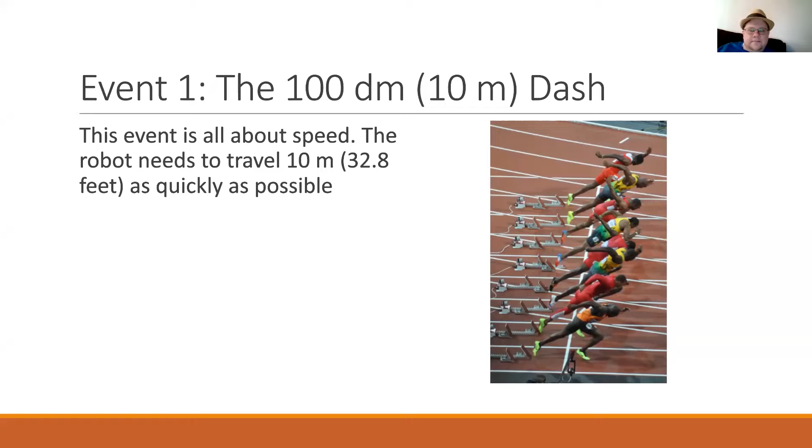So do you folks have any questions about the first event? Okay, pretty straightforward. Event 2, we're calling this the hurdles. Although this is more of an obstacle course, but I couldn't think of an Olympic event that went along with this, so we just settled on hurdles here.

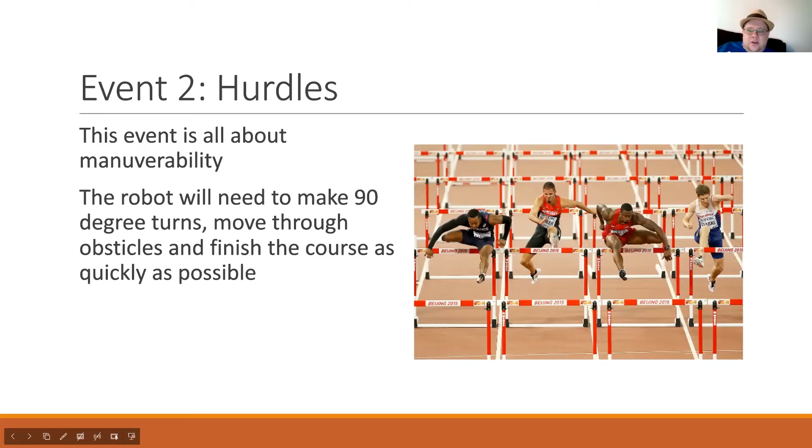This event is all about maneuverability. Your robot is going to need to make very tight 90-degree turns, move through obstacles, and finish essentially an obstacle course as quickly as possible. So while speed is a factor, because you do want to finish as quickly as possible, maneuverability is a big deal with this.

Okay, I got a Discord ping. We got to make sure. Okay, one of my other teammates is taking care of it. Thank you Vikram, just wanted to make sure that's okay. So sorry about that.

Okay, but yeah, it's essentially maneuverability. We will be giving more details about the course and what kind of things your robot is going to need to do in the 4th workshop, the last workshop that we're going to be doing. That's where we're going to be focusing on the event and helping you folks get ready for it. Do you folks have any questions about event 2?

Event 3 is a robot climb. In this event, robots will need to climb increasingly steep ramps without grabbing onto anything. Grabbing onto the ramp and pulling yourself up is prohibited. This is all about climbing up with just the torque in your wheels.

We're going to go as steep as teams want to take it, starting at about a 20-degree angle and moving up to as intense as people want. The idea is you'll climb up the ramp without tipping over. The robot that can climb the steepest ramp will win, with time being used as a tiebreaker if necessary.

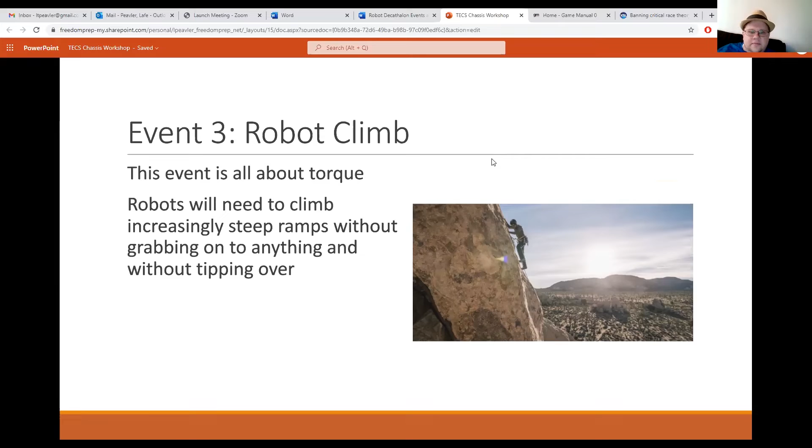A lot of the resources I'm about to present to you today came from both my experience. I have been a coach for FTC for 3 years, and I've used a lot of the systems we're going to be talking about today. I'm also inviting a lot of you to share your experiences with these different systems. I don't want this to be necessarily just me talking, but a lot of the information from this presentation can be found in a resource called Game Manual 0.

I'm actually going to type this in the chat so you can refer to it later: gm0.org. If you do not know about this resource already, this is an excellent resource for you to use. That link is also on the Discord in two places, actually, both in the resources channel as well as the RC resources.

So if you're confused about where to get started, or what a gear ratio is, or what motors you should use, Game Manual 0 is an excellent place. This was written by people that have done FTC, and not just done FTC, but done FTC at the highest levels.

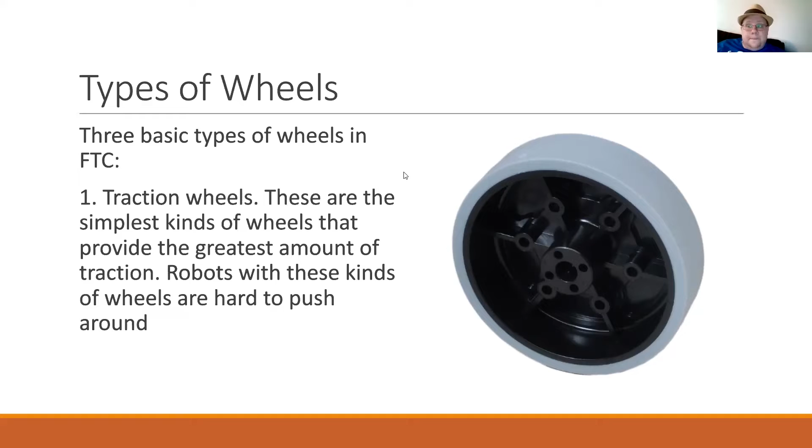The second type of wheel you need to be aware of in FTC are the Omni wheels. These wheels have rollers in them that sacrifice some traction, so they're definitely not going to get the same kind of traction as our traction wheels, but they can kind of slide side to side like these guys do without having to fully turn. So Omni wheels are great if you want your robot to be able to turn more easily. The traction wheels don't turn very easily, particularly if you have a tank drive.

And depending on how you configure your chassis, they can lead to some very maneuverable types of setups here.

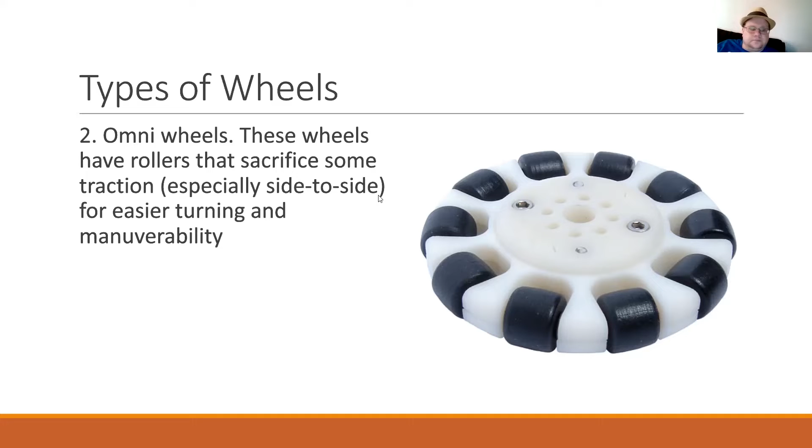And then finally, the third specialty type of wheel that we have are the Mecanum wheels. The ones shown here are the goBILDA V1s, which have been discontinued. A lot of teams still have the V1s. My teams have the V1s. goBILDA has released a thinner version, the V3s, or V4s, I can't remember.

But regardless, the distinguishing factor of these wheels is the fact that they have these 45-degree rollers. And these allow the robot to move and strafe in 8 directions without having to turn. So they are excellent at maneuvering around the field, but that comes at a cost. Mecanum wheels lose a lot of traction because of this. So a robot with Mecanum wheels is much easier to get pushed than one with, say, traction wheels.

They also tend to slip. Now, if any of you have done any autonomous programming with Mecanum wheels, you know that you can't fully count on your encoder counts when you use Mecanum because they can slip and it can throw everything off.

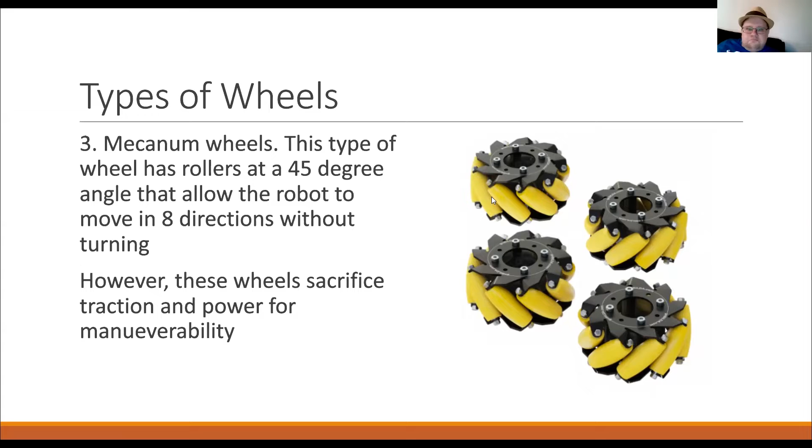Vikram says we've used Mecanum wheels this year. But would personally like to learn more about a traction wheel setup. Cool. The Black Ops also use Mecanum wheels. We've tried the omnidirectionals, but last year we used the Mecanum. Awesome.

Cadets have Mecanum. Okay.

I would like to learn more about how the size of wheel affects the challenges. Yes, that's important when we get to using the right gear ratio on those wheels. The size of the wheel does matter, not to mention getting over obstacles and things like that. So we will talk about that today. That's a great thing.

Thomas says we used Mecanum wheels this year and last year. Yep. Masters use Mecanum wheels too.

Cool, and we had the latest goBILDA one, and they were fantastic. They do not slip as much as the old ones we had before. The V4s you're talking about? Yes, I don't know what version they are, like the latest one they're selling right now.

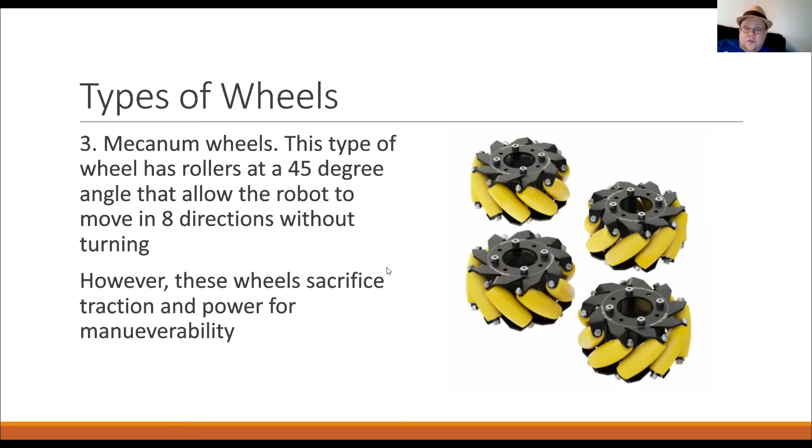Okay, alright, I think we'll move on from wheels. Now let's get to the different configurations. One of the big reasons we're doing this is to introduce you folks to different ways you can set up a chassis depending upon what the game is that year. Now some teams just use the same chassis year in, year out, and there's nothing wrong with that per se.

But there are some configurations that may be better at certain games than others. So as we go along, if you've used a chassis configuration before in competition, any of the ones we've talked about, please say so in chat or speak up on the microphone. So here we go.

So 3 questions I think every team should consider when choosing what chassis to use that year. Question 1: what is the right amount of speed, torque - which we'll talk about more later, torque is force in a circle - and it has a lot to do with how powerful your robot's going to be, how quickly it's going to accelerate, and if you need to push things, how much it's going to be able to push, or resist being pushed.

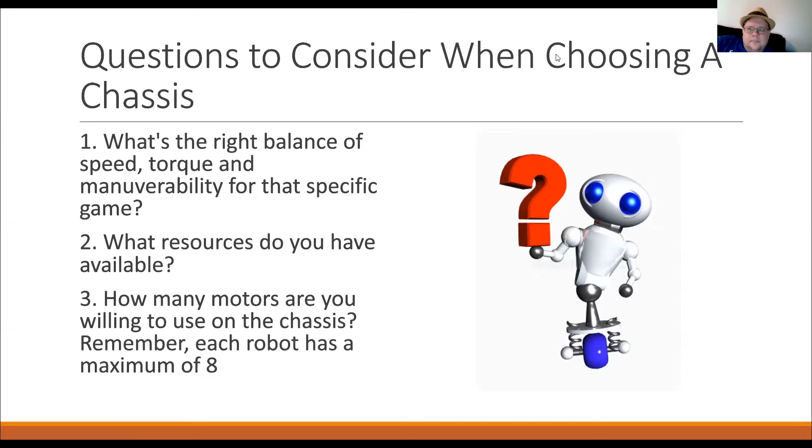It says speed. Speed would be big in Skystone, wouldn't it? Vikram, as the bot needed to be fast and didn't need to be as maneuverable, a fast robot was preferred. Great point, Vikram.

Okay, so now last year's game, Ultimate Goal, how would that be different? How would you approach, if you were to do Ultimate Goal again, what kind of thing do you think would be different in how you would design your chassis? I think everybody here knows Ultimate Goal. I don't think we have any rookie teams here with us today, although we would have loved to have had some.

What kind of things do you think would have been different? Maneuverability was more important. Being able to chase down those rings, and along with lining up the shot, to hit either high goal or power shots or all those kind of things. Any other thoughts?

The point of this is when you're designing your chassis, you need to make sure that your chassis fits what you're doing.

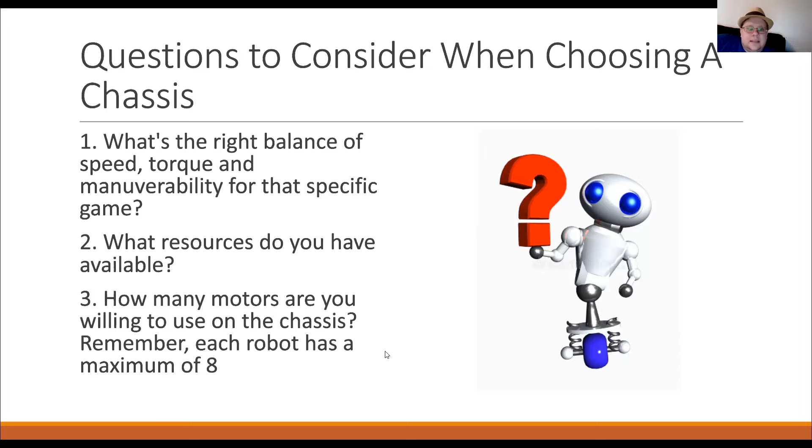Multiple types of chassis configurations can be effective depending on what's your overall strategy, what do you want to accomplish, and making sure that your chassis fits your particular strategy. Not all teams need the same setup, and the thing is, I kind of get this feeling with Utah and with a lot of other places in FTC, is a lot of people have gotten mecanum wheels because they feel like they have to have it, because everybody else, all the top teams, have it. We feel like everybody needs to have it in order to keep up.

Well, Perspective, one of the Park City teams, did you notice that they didn't use mecanum this year? Because they didn't. So don't think that you have to lock yourself into one type of chassis just because everybody else does it. That's one thing I want to emphasize today.

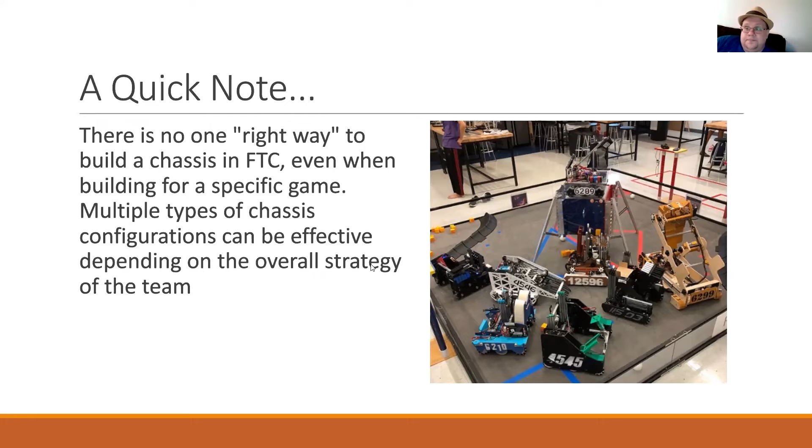Okay, so let's start with the basics. The very most basic type of chassis you can get in FTC is a two-wheel tank drive.

If you were to put 4 traction wheels on this thing, it would have a devil of a time getting turned. The only nice thing about this design is it's simple, easy to build, easy to program. This is a great beginner bot, and that's about it.

Because it only has 2 wheels, it doesn't excel in speed, torque, or maneuverability. This bot can be easily pushed around by other bots. This is a good way to learn the basics, but other than that, you really should move past this as quickly as possible, because a 2-wheel tank drive is not very likely to be very competitive in FTC.

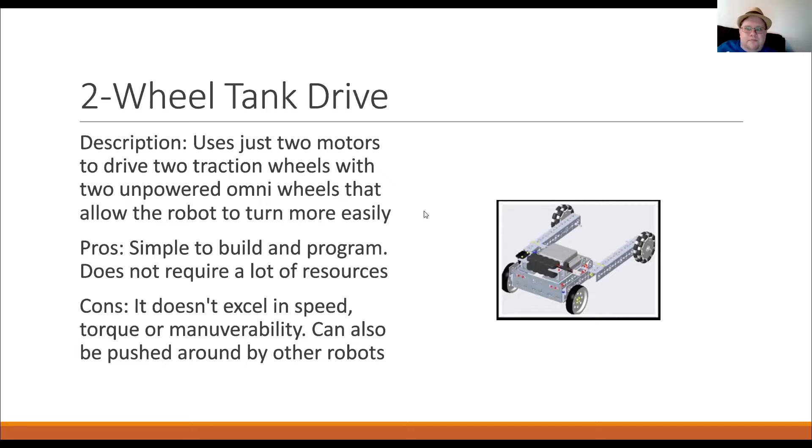So of all the configurations we're going over today, this is one that I would say steer clear of. There are much better ways to build a bot for your buck.

So this is essentially the big difference between the 2-wheel and the 4-wheel: you're powering all 4 wheels. Some teams will do it halfway, using only 2 motors and chaining the 2 wheels together, which you can do if you want. Or what I'd recommend, 2 motors is not enough for a chassis. It's better to use 4 in almost every circumstance, for that extra power, extra speed, all those kinds of things.

So it uses a motor on each corner. This is more maneuverable and often more powerful than the 2-wheel drive.

If you want something that can drive over obstacles, let's say you were doing Rover Ruckus, which had that giant crater thing. Most teams decided not to deal with that and just reached over it instead. But if you wanted to drive over the crater and pick up minerals that way, one possible solution would be to just use larger diameter wheels and be able to drive over it. I think the meta went with reaching over, but it's still a possible solution.

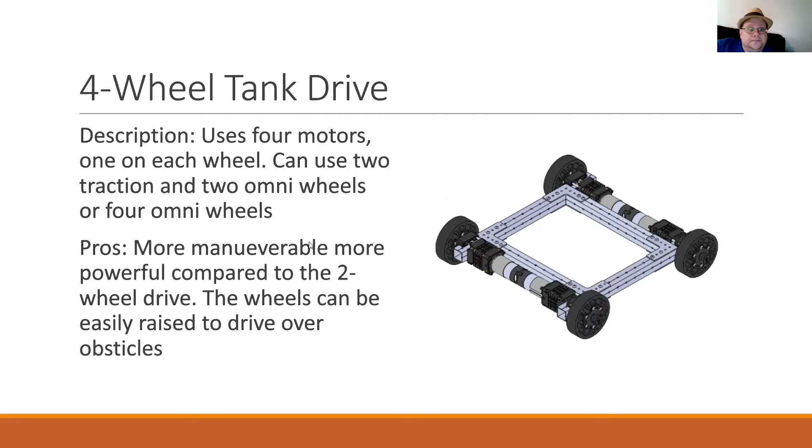The problem is, if you have the high wheels I talked about, the higher you put the chassis, the higher you put your center of gravity, as we'll talk about later on, the more prone it is to tipping over. So that's something you have to take into account.

Also, with 4-wheel tank drives, you have to take into account your weight distribution. This chassis, along with a 2-wheel drive, if you have too much weight on your back wheels, this thing tends to tip back if you're accelerating too quickly. So you need to make sure your weight is more centered, which is good practice anyway. It's not insurmountable, it's not a thing where I'd say don't use this. It's just something you've got to consider when designing your chassis.

So have any teams used a 4-wheel tank drive, or any coaches? Just out of curiosity.

Macy has. Macy, do you want to talk about your experience with it?

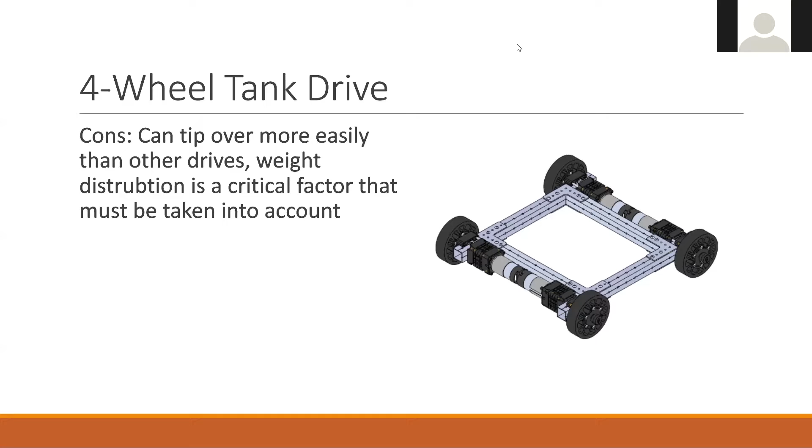So it's probably one of the easiest drivetrains to build, and I would definitely recommend experimenting with building it, because it gives you the fundamentals for being able to do more complex drivetrains. When you get to a point where you are doing, through a gearbox or something like that, direct drive to your 4 motors, it allows you to understand how you can independently control each motor to achieve different maneuverabilities, which understanding how that works is paramount for being able to do mecanum wheels or any kind of omnidirectional movement, right? But on top of that there's a lot of advantages to doing a 4-wheel drive with this.

It gives you lots of torque, lots of power. And so it allows you to be able to make a solid and immovable object, because your wheels aren't going to let you move side to side. So if you're in a situation where you are playing with other aggressive robots or whatever else, your robot isn't going to move unless they are overpowering your motors, right? Because you're not going to get pushed side to side, so you have forward and backward movement, and that's it.

So the limiting thing, though, is that you have forward and backward. But because every single wheel is directly tied into a motor, you also have very strong control and precision of where that robot is going to go.

If you leverage something like encoders, or just know how far with your gear ratios your robot can travel and power burst, you can leverage some automation that it's like, all right, I know if I line up on this thing, I need to go forward a square and a half or 18 inches or whatever else. You could program a button to get you there so that you can very easily start making automations with buttons to help improve your gameplay.

I also find that as long as you're not elevating your drivetrain mounting, right, so your wheels are still really close to the ground, you have 4 really solid points that, as long as you keep your center of gravity and your center of mass in the middle of the robot, it's a very solid thing.

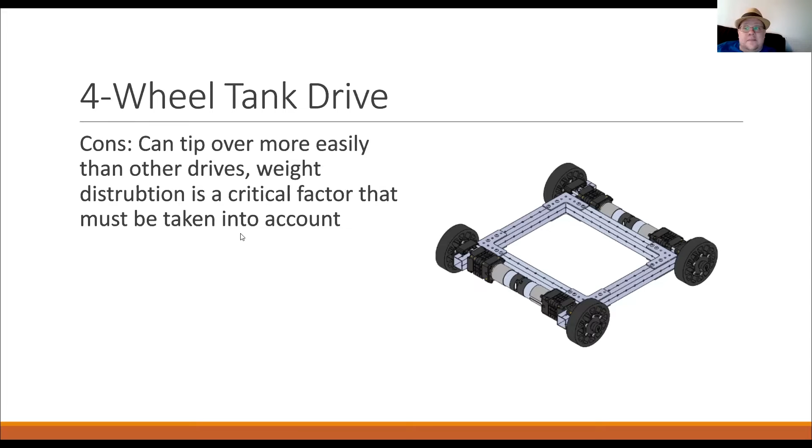Okay, so 6-wheel drive. As it turns out, this is what I've been working on over the past bit. This is one of the recommended configurations for the Rev starter kit V3—a 6-wheel drive. As the name says, it uses 6 wheels, usually a combination of traction and omni wheels. This is the Rev recommended configuration, which has 4 traction wheels and 2 omnis.

There's another configuration where you replace these two traction wheels on the other side with omnis, and you only have traction wheels in the center. We'll get to the drop center one in a moment, just in case anybody is itching to talk about that—we're going to talk about that later as a separate thing, because really it kind of is.

In this configuration, you can either use 2 motors—in this case, this chassis is powered by 2 motors, and the other wheels are attached by chain—or you can use 4 motors if you want, to get that extra torque and speed. After putting this together, I really like this configuration, even for beginners.

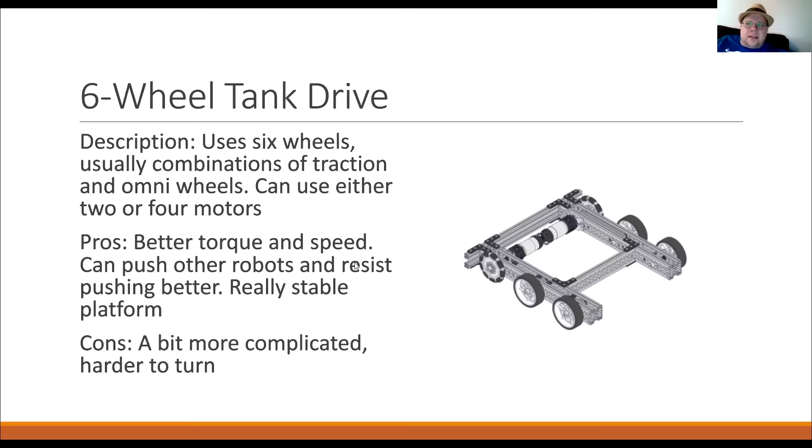Okay, so now this next one is a variation of a 6-wheel called the West Coast or Drop Center Drive. The big difference between this and the regular 6-wheel is that the center wheel on my robot, it would be this wheel, is dropped down a little bit lower than either end.

You can use for the middle wheels, you definitely want traction wheels. And then you can use any combination of Omnis or traction wheels for the other 4 wheels, depending on what you want to do. Why do we drop down the center?

Well, the big reason why is because it greatly lowers what's called the turning radius. So one thing that affects, and one of the reasons why the normal 6-wheel drive has a harder time turning is because the turning radius is pretty big. This tries to solve that problem by essentially making the turning radius just on these 2 wheels here.

So it makes this much easier to turn. So it's a pretty solid combination of torque, speed, and it has that extra turning ability. Has anyone ever used a West Coast or a drop center drive?

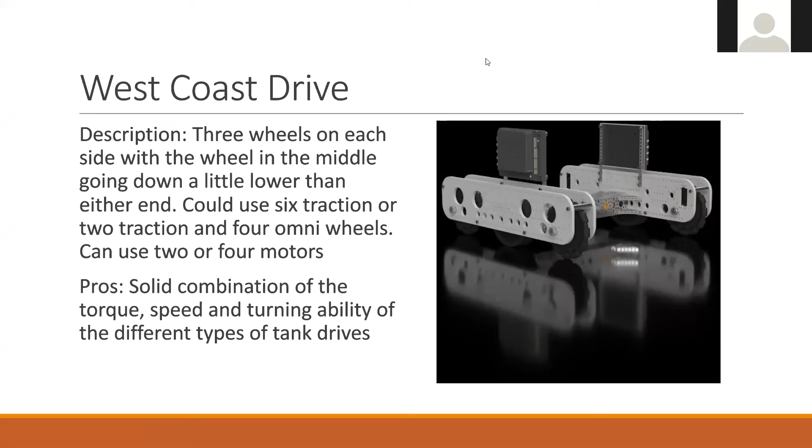I built one, but that was for FIRST Robotics Competition. I haven't actually used it for FTC. Yeah, but I built it, we just haven't driven it. The chassis is built, but the programming, the wiring and stuff is not completed, so it hasn't been driven. That's a pity.

Vikram says he thinks a teammate is developing one or is looking to develop one. And it looks like Black Forest was using Mecanum. Black Forest used Mecanum, okay. I thought it might have been 6-wheel. Oh, well, okay.

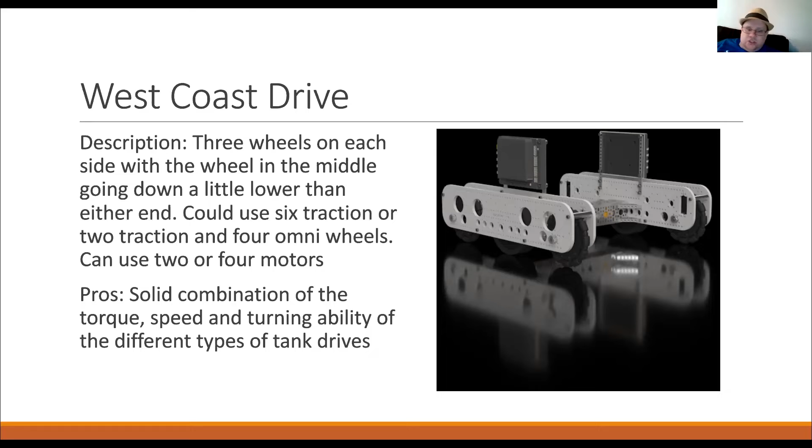So the biggest con with this one is it is a bit more complicated build. Now, particularly if you're going to build in a build system like Tetrix, it can be a little tricky to get the spacing right, particularly for that bottom wheel.

Now, GoBilda, if you use the GoBilda system, they actually have ready-made spacers that allow you to build the West Coast. And, you know, even though I say it's a more complicated build, it's not that much more complicated, but it does take some extra thought or extra resources.

And this one can get stuck if you're not careful. So if you're driving over an obstacle with a West Coast drive, or you hit something and something gets under one of the wheels and the center wheels disengage, you're stuck. You're just going to sit there spinning your wheels.

And when I was researching this, I've seen competitions where a robot has run into a game element, like those little cubes for Rover Ruckus, which are coming back for this year's game. I've seen robots get stuck on those, and then they just spin their wheels for the entire time because they can't move, because they only have really the 2 points of contact with the ground, which are those two center wheels.

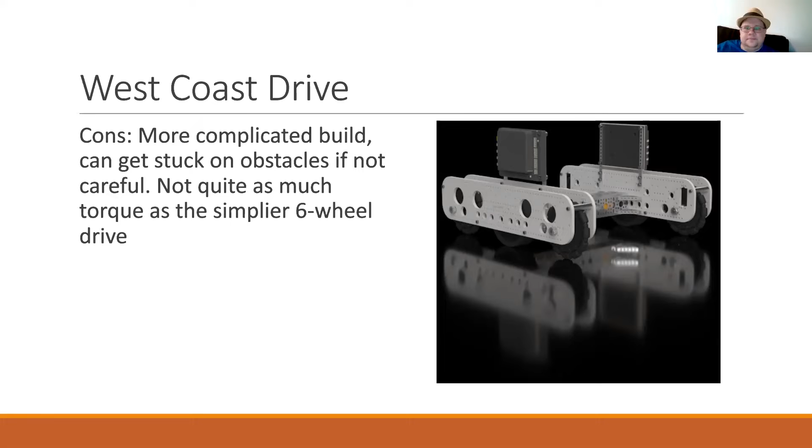All right, any questions on that or additional comments? All right, I think we'll move on from West Coast then.

All right, the system that almost all of us use, know, and love, the Mecanum drive, okay? So the idea is we're using 4 specialized wheels, the one with the rollers, that allows the robot to move in 8 directions without turning, okay? Now, unlike all of the other tank drives that we've talked about so far, this one absolutely must use 4 motors, okay? You can't run a 2-motor Mecanum drive, or at least I don't think you can.

So it requires 4 motors. The big pro, the reason why you go with Mechanum, or Mechanum, I've heard it pronounced both ways, tomato, tomato. It goes both ways. Yeah. So...

It is one of the most maneuverable chassis configurations out there, just because you can strafe in 8 directions without turning. By the 8 directions, I mean forward, back, left, right, and the 4 diagonals. So really, really excellent maneuverability. And that makes this one of the most popular choices, if not the most popular choice, in competitive FTC.

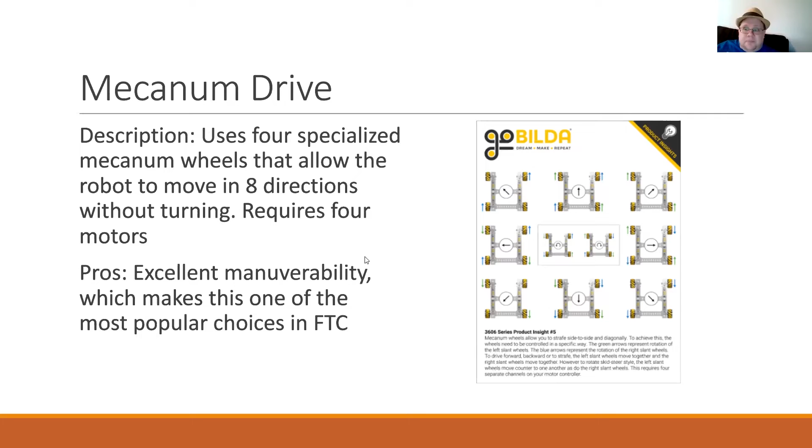So, how many teams... I've already kind of asked this question before. A lot of teams have already said they use Mecanum, so I don't think we'll go ahead and ask that question again. But a lot of teams have a lot of experience with Mecanum.

But it does have its downsides. One is cost. Mecanum wheels often cost a lot more than your Omni or traction wheels. I think a set of GoBildas is like 120 or 130. I think some of the other systems, like Revs, are like 99 or something like that, a little cheaper. I don't remember off the top of my head, but you are going to spend more money on these wheels if you invest in Mecanum than you would with other systems. And some teams might not have the ability to do that.

It's also more difficult to program. Okay, do we have any programmers with us that have programmed a Mecanum drive? I'm curious. Yes. Yes. Is it easy?

Once you know how to do it, yes. But trying to get it working in the first place takes a lot of work, a lot of researching, a lot of learning how it works. But once you make it work, it's really easy after that, as long as you remember the right steps to get it working again. Come a new year, so... But compared to a tank drive, this is definitely next level programming from, say, a tank drive.

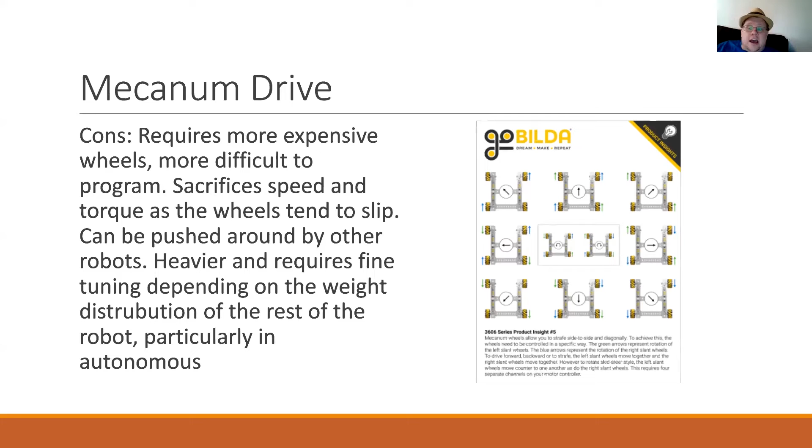Another type of drive, which I think I saw a few robots at State that did this, the X Drive. You're essentially using 4 Omni wheels at 45-degree angles, and like Mecanum, it does require 1 motor for each wheel.

The pros for this is it's extremely maneuverable, similar or even a little bit better than Mecanum Drive, because one of the things I found out in researching this is Mecanums, due to the design of the wheel, are limited in how fast they can strafe left and right. This configuration, the X Drive, can actually go faster strafing left and right than you do with Mecanum wheels.

So this is an extremely maneuverable drive setup. It doesn't require the more expensive Mecanum wheels. The wheels are lighter, which can be a good thing and a bad thing depending on exactly what you want out of your drive. It has a similar programming kind of thing to it.

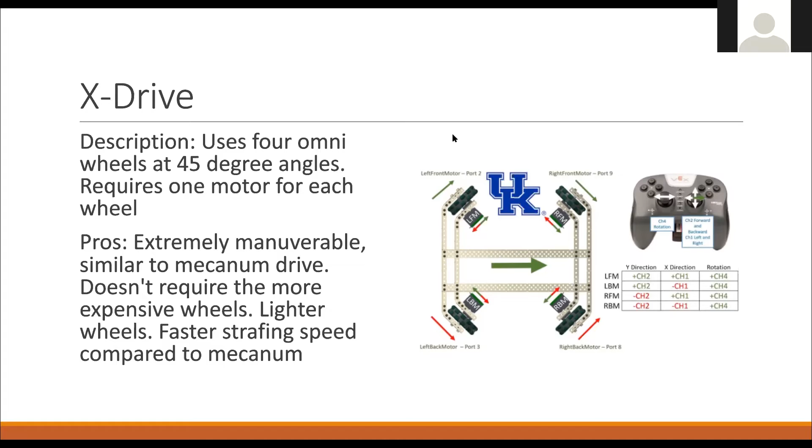One of the things you'll notice is a lot of teams that excel within FTC, across the board, are the ones that are able to see the software layer and the hardware layer not as separate entities, but as things that assist each other. This X Drive is a great example of where you have hardware that is able to move in any direction because physics, and you take software to enable that to work for you in a great way.

And this is one of those systems where you can set up encoders or something else that does position tracking with your motors and get very fine and excellent control of your autonomous.

The other thing with this is it's probably even easier than Mecanum for being able to get, if you're using either computer vision or anything else like that to do position tracking on the field. This allows you, if you put it into an autonomous program to do those adjustments, the robot could definitely move in very strange and mysterious ways because it can move in any direction, but that could be beneficial. You can leverage that where I need to be exactly positioned between these 3 different targets, so you're doing a triangulation, trigonometry basically, to get an exact position with 3 source points.

But your robot could do that automatically once you get that programmed, and it'll do circles or whatever else to get to that exact point. So it can be very, it's one of those that gives you a lot of options.

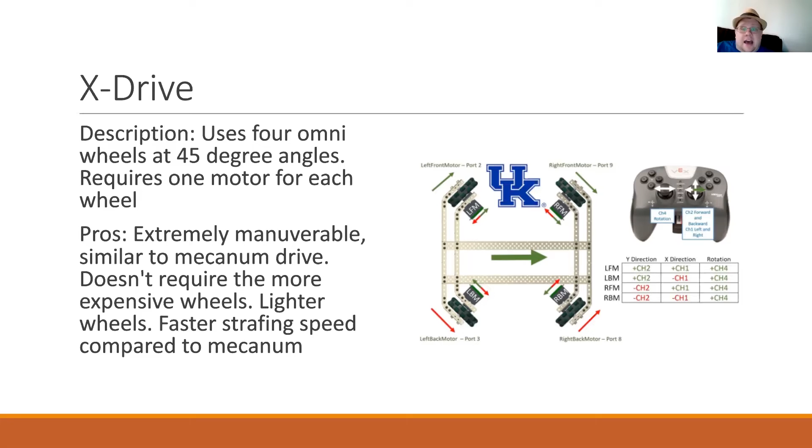So Laurel says plus or minus, used it three years in a row back in the day. Okay, yep.

So again, just like all of these others, there are some cons here. The biggest one is xDrive doesn't have a lot of traction. This probably wouldn't have been a great idea for Ultimate Goal, come to think of it, just because of getting pushed out of the way when fighting for places to shoot for the goal.

There are ways to think around that, but it's something you have to take into account. And the programming is a bit more complex compared to tank drive, but I think Nick made an excellent point in saying it's an excellent step up for teams that want to take their programming to the next level.

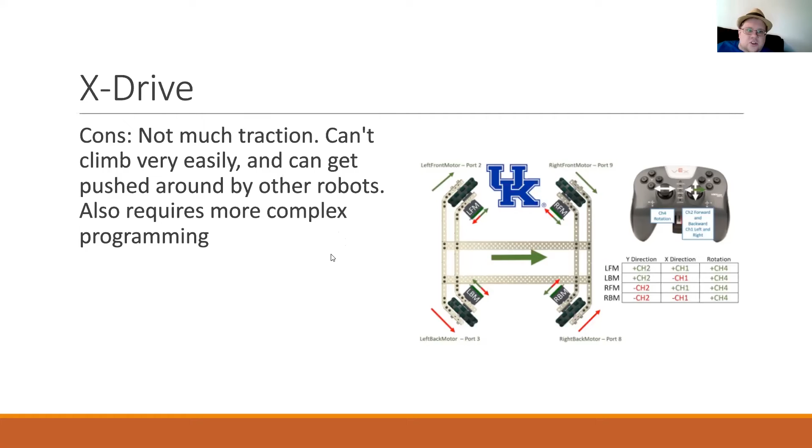All right, we've got a few more drives to go through. I think once we finish our discussion of all the popular chassis configurations, we'll go ahead and break for lunch. So we'll move on here, because I think I've only got two more on here.

So this next one is called the H drive. The H drive uses four omni wheels like a tank, but then it adds this fifth wheel in the center. Sometimes H drives can even use two wheels in the center.

You can do this either with three motors, where you can essentially chain drive two on the left, two on the right, and then one motor for the center. Or you can do five motors. If you wanted to get real crazy you could do six, but I wouldn't recommend that because that leaves only two motors for all your other contraptions and mechanisms.

So what this does is kind of a middle ground between mecanum and tank, because it allows you to strafe like both the xDrive and mecanum will do, while not being as easy to push around as either mecanum or an xDrive is. Just because if someone tries to push you from the side, you can somewhat push back by powering that center motor. It's not quite as maneuverable as some of the others, but it does have some good options here.

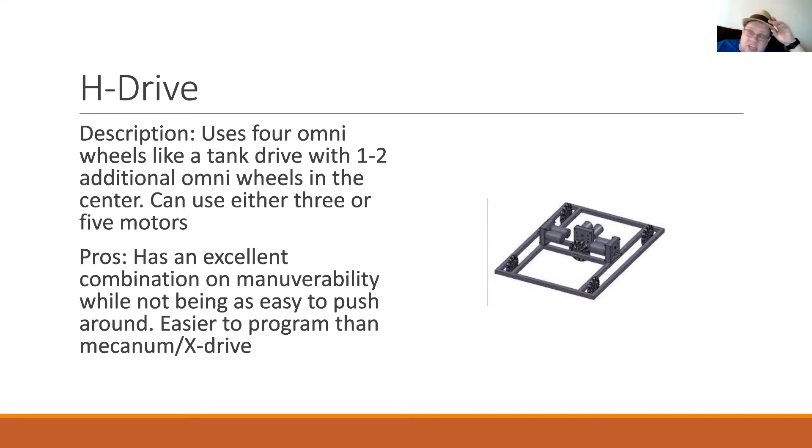This is one of your more exotic drives. I've seen more of these in FRC than I have in FTC, to be quite honest. I can't think of too many H drives even out there on the internet. I found one example of an H drive that a team used down in Texas. I can't remember the name of the team, but it's not quite as common as a lot of the others we've already talked about today.

Some of the cons: it's more complicated. One of the big ones is it gives up a lot of space in the middle, because you have to have the wheels there, the motors there, or the mechanism to transmit the power from your motors there. And a lot of robots use that space in the middle for different things. I mean, think about Skystone, where a lot of teams had just a lot of their things on the side and an open middle so they could use that for an intake system and intake blocks through them.

Again, it's not an insurmountable problem, but it's something that has to be taken into account. Also, while this guy can strafe, it's not going to be as fast or as effective as it will be with a mecanum or X drive.

I don't know if anyone here has used one. I'm going to ask the question anyway: anybody used an H drive before?

I certainly have never seen one. You've never seen one? I've seen it a couple times. Yeah, I've seen it a few times in FRC. I've seen it like once in FTC.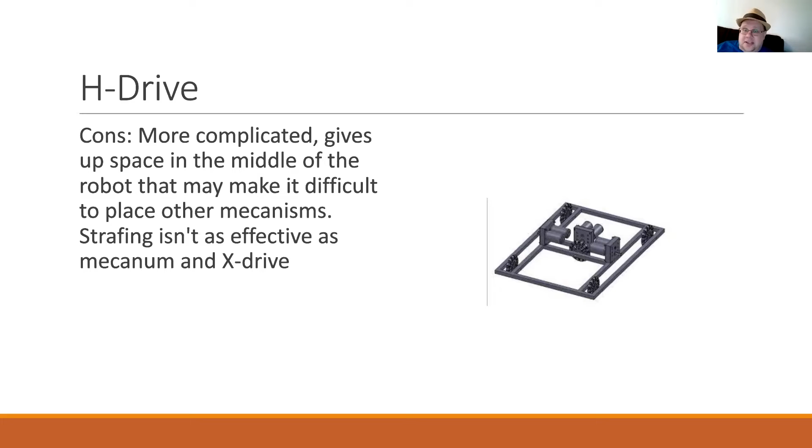So anyway, last one, I'm going to mention it. I'm not going to spend too much time on it. The swerve drive.

Swerve drive - this is where you use the motors to both power the wheels and also physically turn the wheels in whatever direction you want them to go. This is by far the most complicated drive we'll talk about today, and even then, I'm not going to touch too much on it.

The reason teams want to do this - and by the way, the only teams I've seen use a swerve drive and use it effectively are like world-class teams. So things like Gluten Free, okay? Gluten Free has their differential swerve drive and things like that. Teams that are at the top levels of FTC.

Because the swerve drive takes a lot of resources, takes a lot of engineering know-how, takes a lot of maintenance. This drive just takes a lot. It is an extremely complicated drive. It's also a challenge to program.

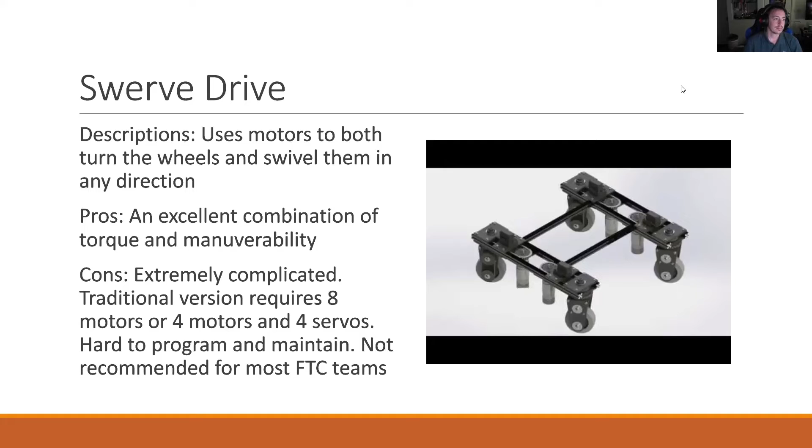Well, I think we'll go ahead and get resumed here. Hopefully the folks that haven't returned yet will pop back in before too long. But I guess one question I'll ask, and you can either say your answers out loud or type them in chat, just like what we've been doing. What have you thought about what we've talked about so far? Has it been helpful? Has it maybe not been helpful? What kind of things do you want to learn more about?

Now, I didn't realize how many different kinds of drivetrains there were. Yes, indeed, there's a lot, isn't there? Thing is, we all just want to push the mecanum button, right? Because that's what we've been conditioned to do. But there's a lot more options than that.

Okay, any other thoughts about what we've talked about so far? Yes, no, maybe? Nothing in chat. Okay.

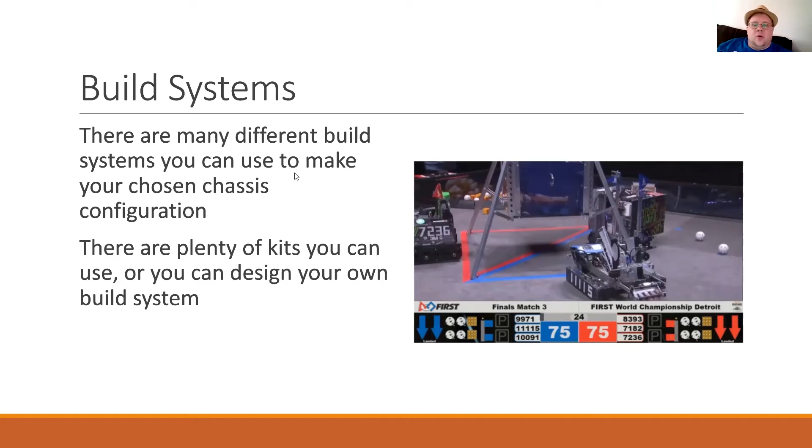Of course, that means that when there's a lot of options, it's like going to the grocery store and you're like, okay, I'm going to go buy some rice. And there's like 10 different brands of rice. Some rice is great for stir fry and others are great for when you just want a pot of rice, I guess. I don't know, some is better for sushi. I don't know why I thought of rice, but that's what came to my mind. But yeah, it's just finding the right kit for you. Or if you'd rather go off and try to do your own thing, that's also an option.

Okay, so a quick note, very similar to what we talked about with the different chassis configurations, is you can have success in FTC using any of these systems. So again, it's like you don't just push the mecanum button and win with the chassis configurations. Also, there's not one build system that is so superior to the others that it just wins all the time. And that includes custom chassis. I've known a few teams that have done custom chassis that have done really, really well and have gotten to Worlds. And then I've known people that have used the same Tetrix kit they've had for like 7 years and get to Worlds.

So you don't have to use a particular system or make a completely custom system to have success in FTC. You just don't, and don't let anybody tell you otherwise. But whatever system you do decide to choose, make sure your team has the resources, ability, and time to make the most of that system.

So if you're going into next season - what's the name of the game this year? Freight Frenzy - yeah, you're going into Freight Frenzy and you're like, oh yeah, we're gonna make a custom chassis and it's gonna be awesome. And then you spend all of your season building your custom chassis so that a month out from your first qualifier, yeah, you finish your chassis, but you have nothing else done. That's probably not going to end well for you. Okay, so make sure you take the time and plan out the time to do all those kinds of things.

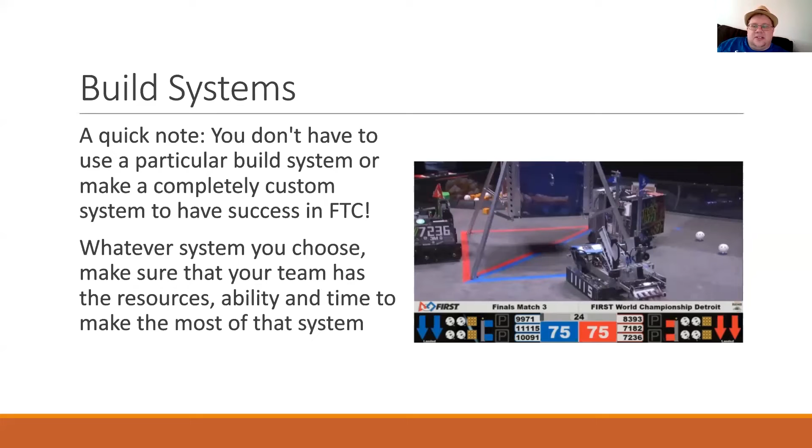Okay, let's start with Tetrix. Boy, oh boy, oh boy, oh boy. I still want to hold to what I just said, that you can have success using a Tetrix system. There are some top tier robots that use Tetrix systems or have Tetrix bases. But out of all the kits I've tried - and the 3 kits I've tried are Tetrix, Rev, and goBILDA, so I have experience with all 3 of those systems - Tetrix is by far my least favorite of the 3. That's my own opinion, putting that out there.

It is one of the kits you can buy directly from First when you register your team. It's not too expensive, which is a good thing, particularly for teams starting out. And in all fairness to it, it is a pretty intuitive system in most ways - pretty simple to use. The channel is nice, getting your spacing is pretty easy with Tetrix, mounting your motors, all those things. It's a pretty user-friendly kit.

But here's where I really don't like Tetrix. It really is, I feel, considerably lower quality than a lot of the other options on the market, particularly Rev and goBILDA.

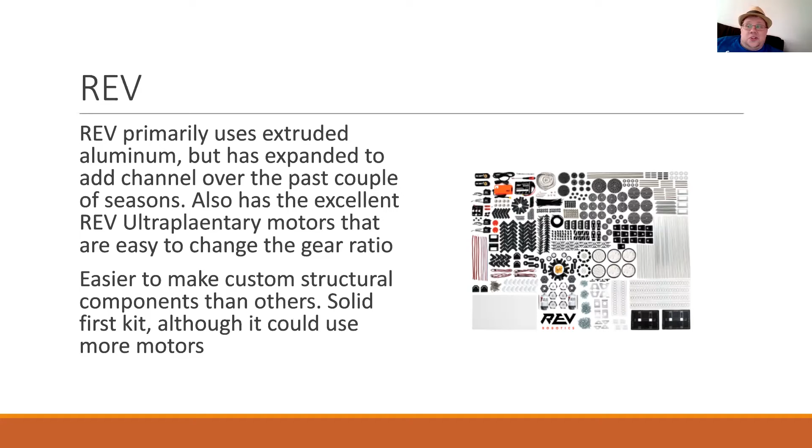My team has used Rev considerably for the last few seasons. Full disclosure, the teams I've coached have primarily used a combination of goBILDA, Tetrix, and Vex, which in hindsight maybe I wouldn't mix those systems in the future because they really don't play nice with each other.

Vikram says that was very interesting, talking about the other team. Whereas the other team used a combination of goBILDA and Rev, and in all honesty these systems actually work surprisingly well together. One of my lead builders, Travis, who unfortunately isn't here, found a way to modify the GoBilda strafer chassis, essentially putting Rev extrusions all along the sides of it, and then we were able to build on top of it as if it was a Rev system. So that's one reason I like Rev quite a bit, it actually works pretty well with a lot of other systems.

It has a lot of flexibility, it's very modular, very easy to work with. With the extruded aluminum, all you need is a saw to go cut it to whatever size you need.

Also, the one thing I think Rev does better than even GoBilda or anybody else is their motors. I think the Rev Ultraplanetary motor, which we'll talk about later on, is probably the best bang for your buck on the market in FTC right now. Most motors come with a set gear ratio, or you have to buy different gearboxes to change the gear ratio, whereas the Ultraplanetaries have clips where you can change a motor from a 3-to-1 up to a 125-to-1 with just a few clicks. So I really love their motor system.

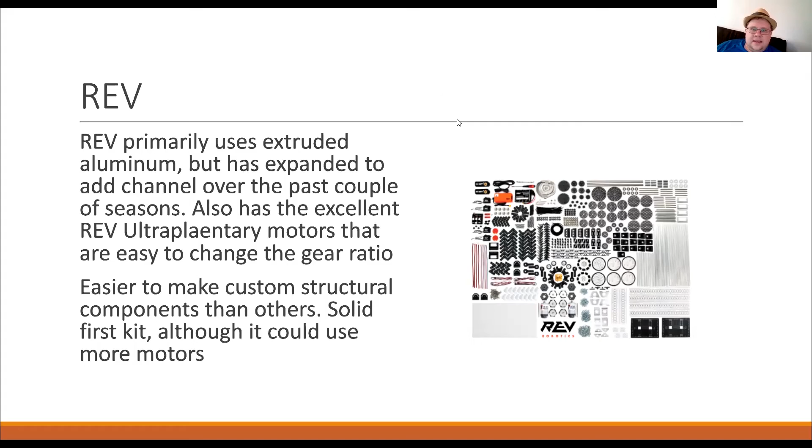Okay, and then third and finally, the new kid on the block, goBILDA. This is the newest system. For those of you that have been around a bit longer, GoBilda essentially came out of Actobotics. The people that founded GoBilda came from Actobotics and decided to build a system specifically for FTC that was user-friendly. So it's a relative newcomer, only been around for 3-4 years.

One of the nice things about it is, unlike the other two systems, GoBilda was made with FTC specifically in mind, built by people who have experience in FTC.

The GoBilda channel is huge compared to a lot of the others. If you hold up a piece of GoBilda channel and compare it to, say, Tetrix, GoBilda channel is huge, which there are good things about. One is you can fit motors inside it. In fact, a lot of their strafer kits are designed so that the motors fit inside the chassis. But one of the things we've struggled with is GoBilda tends to skirt the line around that 18 by 18 by 18 starting size a little bit too much.

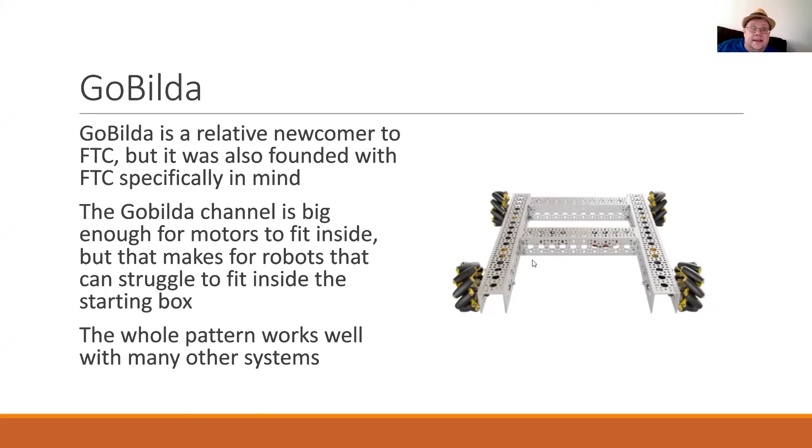One of the good and bad things about GoBilda is, particularly since they're such a new company, they've been constantly updating their parts, their motors, their wheels, and things like that. And the thing is, that's both good and bad.

Because really, I've got the GoBilda V1 chassis with the old mecanum wheels, and we only got them 2 seasons ago, and they're already outdated. I can't buy them anymore because they're out of stock, since GoBilda's moved on to the V4s. Do I need to buy the new ones? No, the ones I have work just fine. But it's a little irksome to buy something brand new only to have it get outdated within a couple of years.

Plus, my teams like to dye the colors of the wheels for different things, and that was possible with the V1s. Now that whole system is already gone — you can't buy the blank wheels anymore because they don't make them.

Don't get me wrong, GoBilda is a very solid system. It's a very trendy system. You'll see a lot of teams out there use the GoBilda system, and they've been really active in trying to promote themselves to the FTC community. They've gotten a lot of love from the FTC community because it's built for FTC.

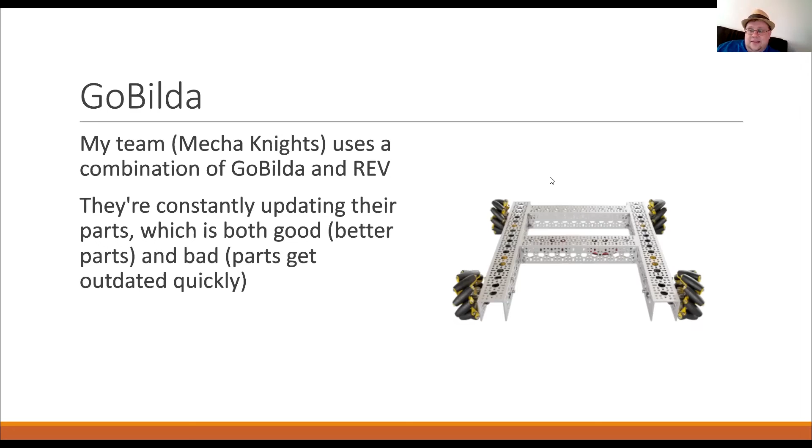Anything else? I just want to say, GoBilda—and Actobotics sells these too—they have servo blocks. And the only time my team broke a servo was the one that didn't have a servo block on it, because especially the GoBilda ones are gigantic. But if you get the Actobotics one, they're a more reasonable size. And those are great.

As far as GoBilda in general, what I like is the motors are a lot easier to mount, and the motor mounts are a lot more secure than anything from Tetrix or REV.

Yep, those are all great points—servo blocks. I actually like the Rev motors a bit better than the GoBilda ones, but I like the GoBilda servos and servo setups a bit better than Rev. So I'm kind of split on those, my own personal opinion. But the servo blocks being able to support that, yeah.

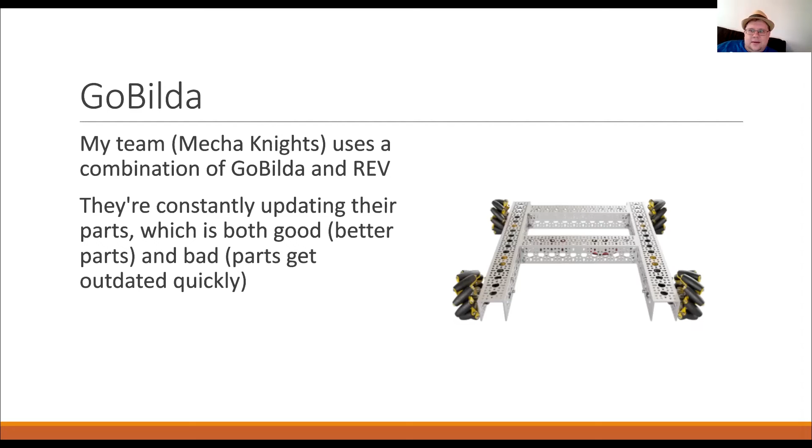Any other thoughts? Okay, one more system then before we get to the custom ones: AndyMark. I actually have one of those that Laurel has been kind enough to lend to me for this—let me go grab it.

Okay, here it is. So AndyMark has their own kit, but they really push this TileRunner series. I don't know how old this particular version is, and they're doing constant updates as well. One of the nice things about AndyMark is a lot of their chassis, including the drop center like the West Coast Drive, have essentially already had the design work done for you, putting together many of the different types of chassis alignments we've talked about—whether that's a mecanum drive, a 6-wheel drive, or a West Coast drive. AndyMark kind of takes some of that design work off of you, for a price.

AndyMark—these things are expensive. I just checked before I hopped on here: for a 6-wheel drive, just the TileRunner and things like that, it's $600. That doesn't come with much—it just comes with the tile runner and the 4 motors, that's it. You don't get any of the other things. Whereas you can get a Tetrix, a Rev, or even a GoBilda kit for less than that. So this is for teams that have the financial means to do that. This one is definitely one of the more expensive options.

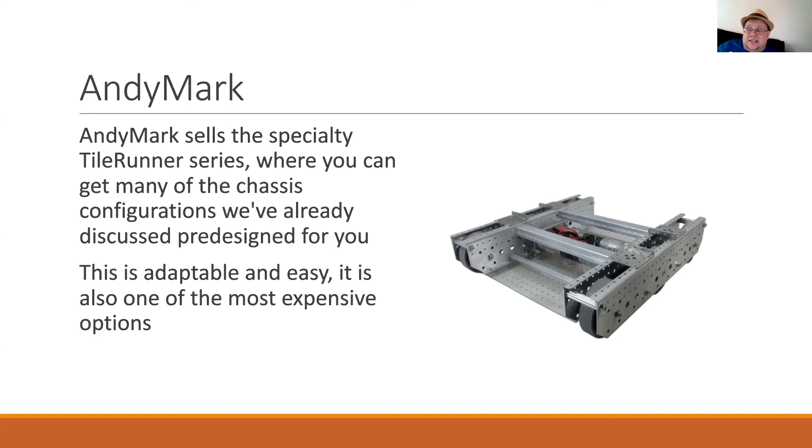All right, then you have custom options. In FTC, your team has the option to not use a kit and create your own custom chassis. Now, a lot of even custom chassis will still use parts for one or more systems, so you don't have to completely reinvent the wheel. If your team has access to some tools, you could use things like laser cutters, water jets, or CNC machines to make your own designs.

And you could say to yourself, well, I don't have access to any of that, or I don't have a school shop or things like that, I'm a homeschool group or something like that. Well, here's the thing, and here's how some teams have gotten around that.

One thing that's popped up around the state of Utah, along with a lot of other places around the country and the world, are things called maker spaces, where for a fee you could go in and use a laser cutter or a water jet. You could partner with a company. You don't have to own a laser cutter or a water jet or a CNC to be able to use it on your robot.

There is a makerspace open to FTC teams, FLL teams, and FRC teams in Salt Lake City. They are actually planning now to have a full FTC competition set set up in their space for the entire season. And that is for you guys. You guys can schedule and go in and use the space. I will get that address out in a later email.

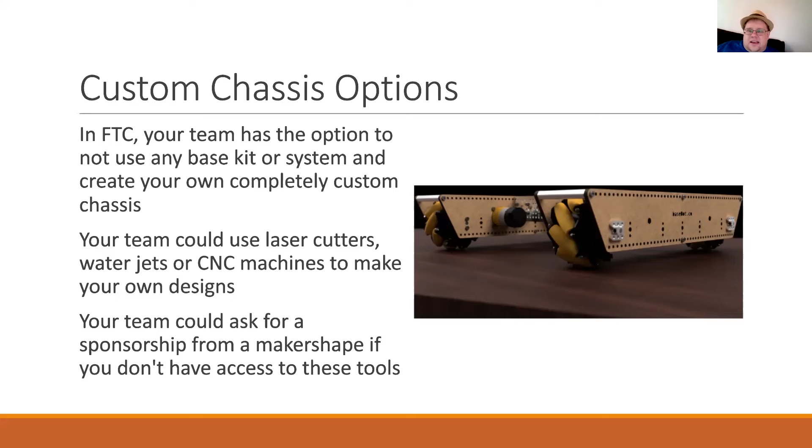So yeah, there's a lot of options here. Don't think that you're limited by just what you have available at your school or in your homeschool group or in your community, because you have these options here.

Also, don't think that you have to start completely from scratch. You don't have to reinvent the wheel when building a custom chassis. This design here, this picture I got, is from an open source thing called Basebot, which was put together by a group of former FTC participants that wanted to make it easier for teams to make their own custom chassis without having to start completely from square one. They've put together files for either water jetting or laser cutting that have hole patterns already for GoBilda style. The other thing about this is that these designs are open source, meaning you can start off with that hole pattern and modify it to whatever your particular needs are.

Or what a lot of teams do when they build their first custom chassis is use the chassis they already have lying around, be that GoBilda or Tetrix or whatever, kind of like what Macy mentioned earlier with his team, how he just took pieces of aluminum and drilled holes that matched. Don't think you have to start from scratch. In fact, you certainly don't have to. There's a lot of options for you if you want to make your own chassis.

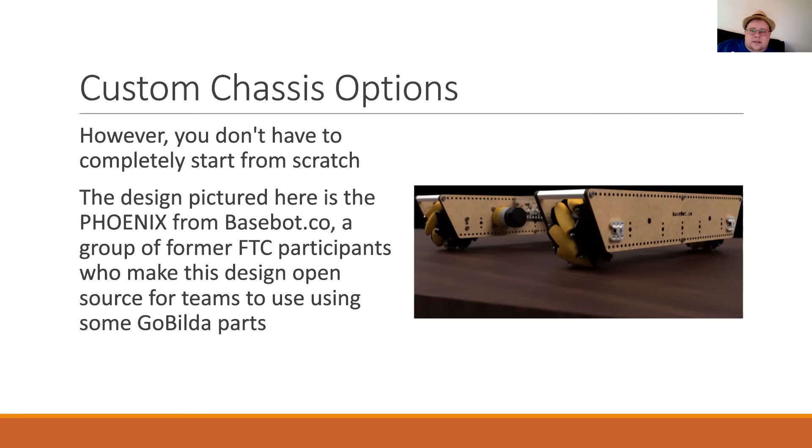One thing I will say about making your own custom chassis: this is recommended for teams who have the time and experience to spend that extra time designing, creating, and troubleshooting their own chassis. You're going to want to do CAD with this, particularly if you're going to partner with a company or a makerspace. You're not going to be able to go back five or six or seven times for most things and just get it right. This is going to take more time in the design and prototyping phases, making sure you respect their time.

Also, if you're partnering with one of these places and you go to competition and it breaks, you're out of luck, because most companies aren't going to be open on Saturday for you to say, hey, our custom thing broke in the middle of competition. Yeah, you're probably out of luck for that day. Which is another thing to keep in mind, maybe having spares, for example.

It does take some extra time. I don't know if I'd recommend this for rookie teams. In fact, I probably wouldn't. I think a rookie team would be better served learning how, unless they have a team that's able to walk them through the process, or some solid mentors. Even then, I think I'd rather have them start on a kit.

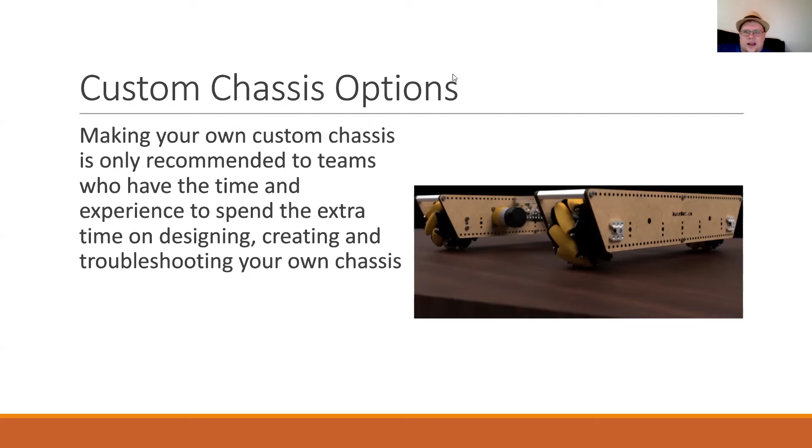All right, well, if there's nothing else, we'll go ahead and move on. Drivetrains.

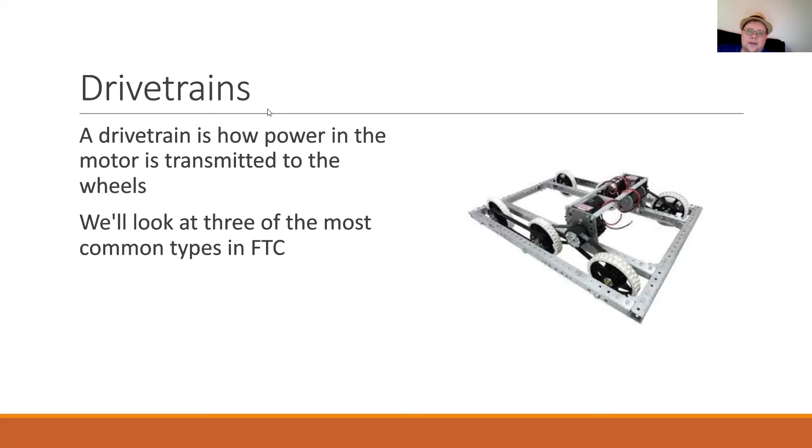So what makes a drivetrain different than a chassis? In the way I'm talking about drivetrains, this is essentially how do we get power from the motor to the wheels? Let's look at the three most common types with FTC.

The easiest is direct drive. That's where you just take your wheel, take your motor, take your wheel, pop it in, you're done, right? You just take the output shaft on your motor and put a wheel on it. That's essentially a direct drive.

It's simple, it's compact, it doesn't take up a lot of space, doesn't take a lot of thought, but boy, can this be hard on motors. Direct drive for most situations is not recommended, particularly for drive motors, because it's harder on the motor. You can bend your shaft, you can break your gearbox, and it also limits what kind of gear ratios you can go to.

Whereas with the other systems that I'm going to show you, like with gears or chain, you have more options in how you can change the gear ratios to match your situation here.

So the thing is, the Tetrix pushbot, I kind of wish they'd redesign that, to be honest, because I think you could do better with the Tetrix system than that basic pushbot. That pushbot has direct drive, and so a lot of rookie teams try that out, and then they end up bending their motor shafts because that's the way they did it. So I kind of wish Tetrix would update that. But that's neither here nor there.

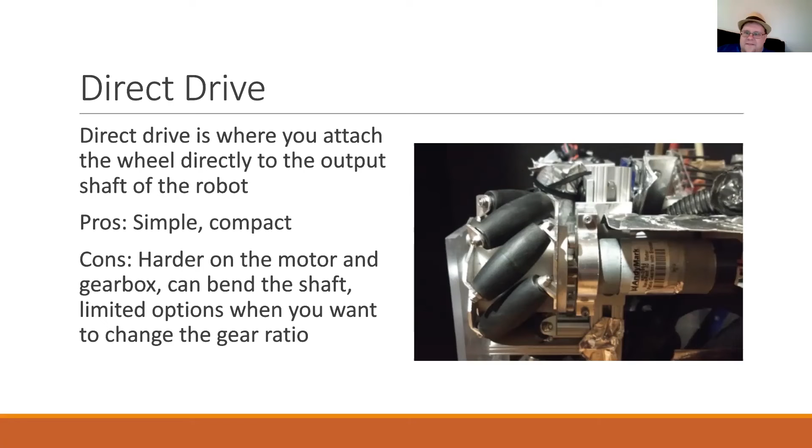Anybody want to talk about experiences with direct drive, just plugging in your wheels to your motors?

Okay, gears. So gears use teeth to transfer power from your motor to the wheels.

I'm going to pull up this AndyMark example. I don't know if you're going to be able to see this, but this uses a gear drive here, this particular version of the TileRunner. Point right up here. I don't know if you can see the gears very well, but there they are. So gears use teeth to transfer power from the motor to the gears or to the wheels, or if you're using this for something else, it'll transfer power to whatever mechanism you're using.

One of the wonderful things about gears is they've been around for a long time. In the game manual 0, it talks about how there's a reason why gears have been around since like 400 BC and have been used up till this day, is because they work. They're very effective at changing the gear ratios, the power and torque ratios of things. They're compact, they're efficient. They're a great option to consider when looking at how to transfer power from your motors to your wheels.

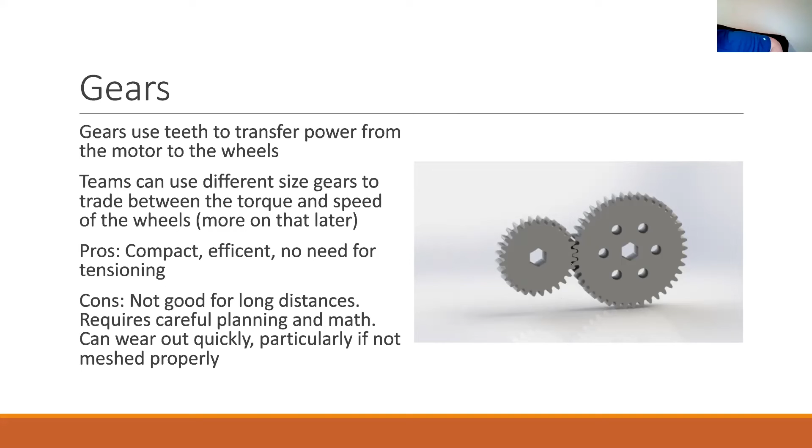So chain drive uses chain. Shocking, I know. Chain drive uses chain to transmit power between sprockets, which are these round pieces with the teeth on them that allow the chain to transmit the power between them.

Some of the pros with chain drives is they're great for long distances. You can see that with my chassis here, I'm able to chain all three of these wheels together, and it's actually pretty easy to do that. Now, I actually don't have one single chain that does this, I actually have two different chains that do that, but it's really good for longer distances. They're durable. Chain doesn't break very often in FTC.

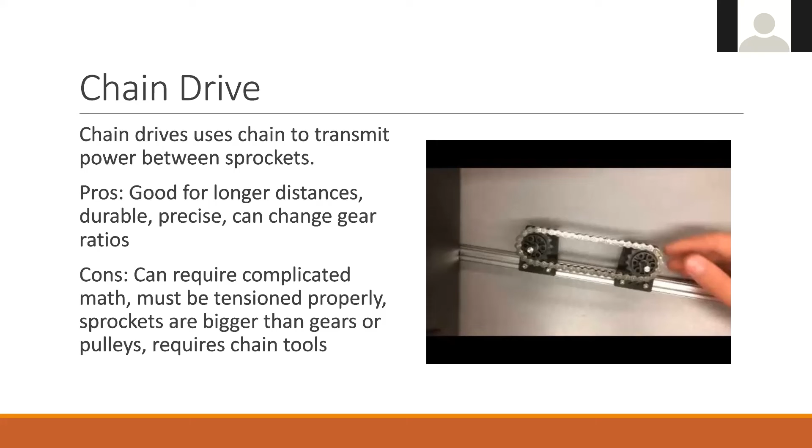So when you put things into perspective, going from FTC into the quote unquote real world, in FTC you want to learn and apply some of these lessons so you don't have to do it later. How do we do stress testing? What does that look like? How do we identify what our weak link is to make that better? And with chain, it's quite literally identifying the weak link.

I think I saw something in the chat here pop by. Caleb says you also need to make sure that you engineer a means of tensioning your chain on the fly, since chains lose tension. So yeah, chains will loosen over time, even over the course of one competition. We found the best way to do this is by using motors with offset shafts. Thank you, Caleb, for adding that, because that's a really good point. Chain will loosen over time.

Also going along with that, it's usually going into particularly your first few qualifiers. I've begged and pleaded with my teams, please get your robot done at least two weeks before so you have time to practice and troubleshoot. Sometimes they believe me, and sometimes they haven't. They're like, nah, we'll just get it done the night before and it'll be fine. No, it often isn't.

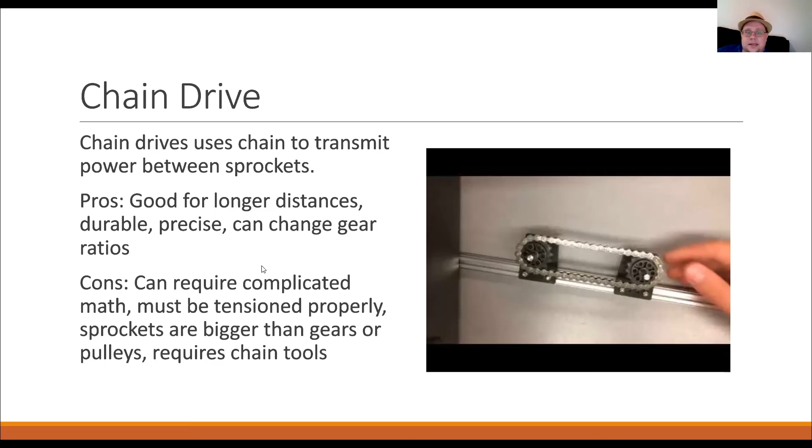Okay, now for belts. So belts and pulleys.

Anybody who ever worked on a car before? Looked under the hood, looked at all the belts and things. Just me? It's one of the things that my dad had me do from a very young age. Oh yep, Macy just put up his hand. Okay.

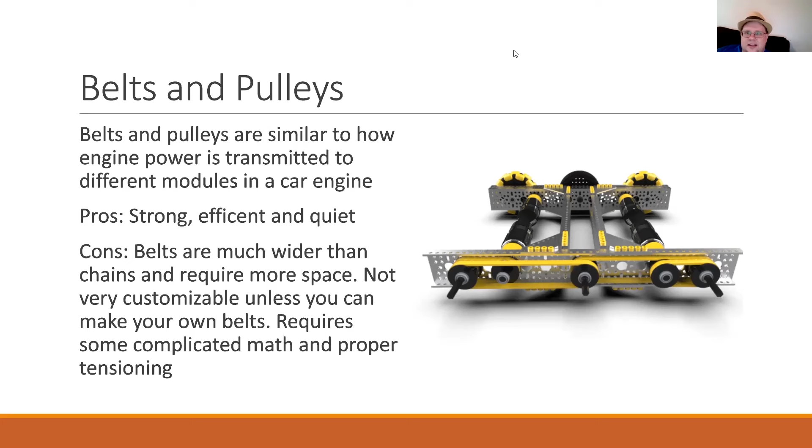So one of the things I'm glad that my dad had me do is I learned how to replace an alternator. And part of replacing an alternator is taking off and putting back on those darn belts, and making sure they have the proper tension and all that.

So the pros of using a belt drive is they're strong, they're efficient, and they're quiet. I don't know how much we care about how quiet something is - I'm sure your parents, if you're working with your robot at home, appreciate how quiet your robot is. But Nuclear Minds had an awesome robot, and it was anything but quiet.

Belts have a much wider space, so you have to take that into account - that's a bit of a con. They're wider than a chain, so you need more space for it. But then again, that wider space is also a pro, because belts, as long as you tension them and take care of them properly, are less likely to slip off.

Okay, now they can stretch just like chain can, so you'll want some sort of idler system to help adjust the tension as you go.

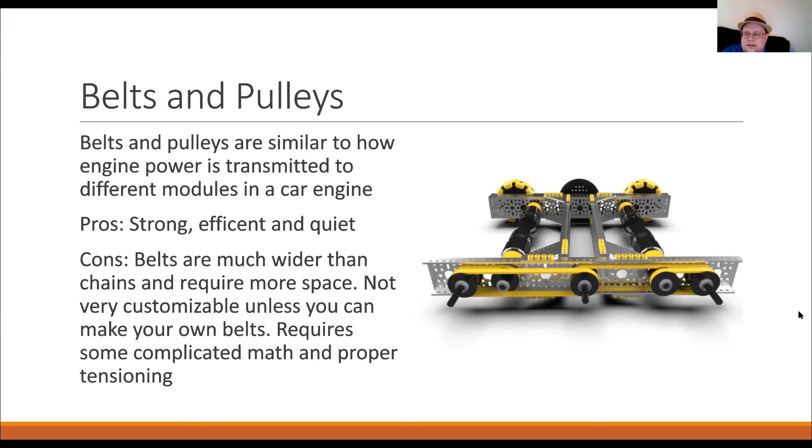Well, thanks for sharing that. Okay.

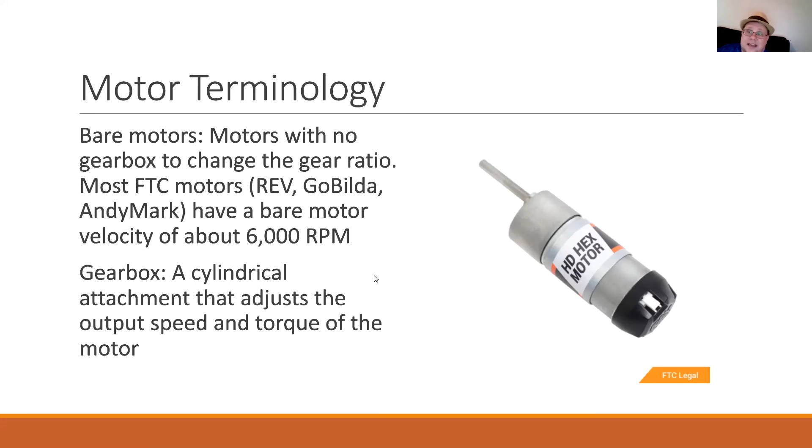A gearbox is a cylindrical attachment that adjusts the output speed and torque of the motor. So I start off with my bare motor going 6,000 RPM. I stick a 20-to-1 gearbox on there, and now it goes 20 times slower, essentially. But it also has 20 times more torque. We'll get to that relationship a bit later. Now is it perfectly that way? Well, not quite, because we don't live in a frictionless vacuum, but it's close enough.

There are a couple types of gearboxes you can get in FTC. The first type is the spur gearbox. Spur gearboxes use a series of gears and usually an off-center shaft. That's one way you can instantly tell if something's a spur gearbox: if the output, instead of being in the center, is off to one side. That's almost a dead giveaway that it's a spur gearbox.

However, there are some sneaky ones. I decided to pull out this motor, okay? This is the Rev Core Hex motor, and this is also a spur gearbox. Just so you know. While these guys have their places, they're not great for high load applications, so anything like a chassis or a lift arm, particularly if you're doing an arm that's going to lift the robot or something heavy. If you look at this picture, you can see there are a lot of places where there's not a lot of teeth interacting with each other, which are prime places for failure. Game Manual 0 says these are not recommended for drivetrains if you can avoid them, just because they are more prone to break than the planetary gearboxes.

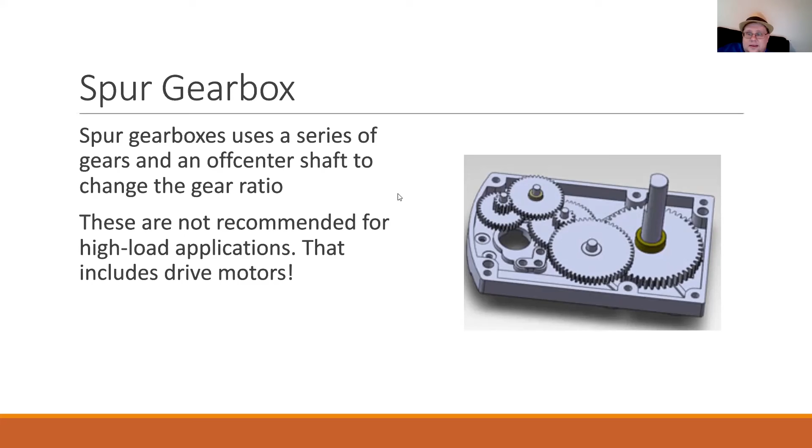Okay, planetaries. If you have an option, this is what you want to use. A planetary gearbox, if you were to pull it apart, would show some sort of center gear, often called the sun gear. So think about those basic models of the solar system from second or third grade, where you have the sun in the middle and the planets rotating around it. That's where this gets its name: you have the sun in the middle and the planet gears that go in a circle around it.

These are superior pretty much in every way as far as using them on a drivetrain to a spur gearbox. This is what you should be using. Now, there's a lot of different companies that sell planetary gearboxes - Rev does, Tetrix does, GoBilda does, AndyMark does. So pretty much everybody has some version of a planetary gearbox. And for your chassis, I mean, these are just fine for other things, but for moving your wheels, for your drivetrain, you want to make sure, if at all possible, that you're using a planetary gearbox, just because it will last longer and it's less prone to binding up. This is one of those times where I'm going to say, yeah, this is really what you want to do.

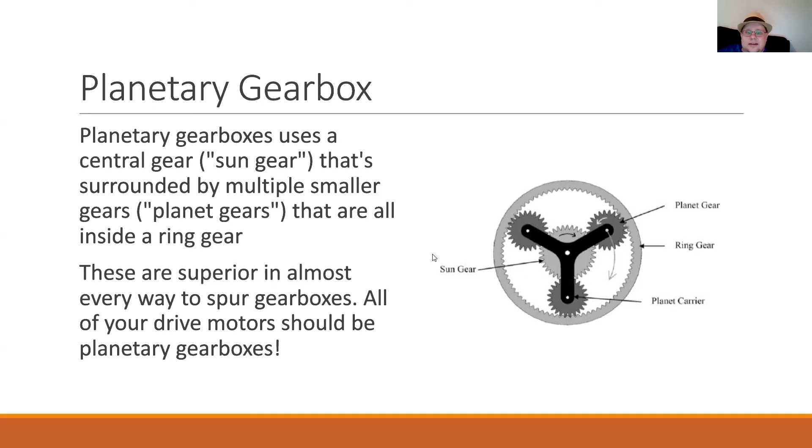Okay, hashtag not sponsored again, but out of all the motors I've used, if I were to pick one motor - now you could make any motor work - but if I were to invest, if I had money and I was to invest into motors, which I have done before, what motors would I pick for FTC? And the answer is I'd use the Rev Ultraplanetary system.

We got these last year as well, 2 years ago now, as part of our robot, and I love these things to death. The reason why I love this system is because it's so versatile in what it can do. You can go from bare motor to 3-to-1 to 125-to-1, which I don't know - I'm not sure what application in FTC would need that large of a gear ratio, but if you needed it, it's an option.

It makes it so you don't have to buy a whole bunch of motors or a new arm, let's say, that's just for a particular game. For example, for Skystone, you need an arm that can lift up the blocks. Well, you can take that Rev Ultraplanetary, put it to the appropriate gear ratio, and have it for there. Now Skystone's over and we're moving to Ultimate Goal, and you want to use that same motor for that shooter. Well, now you don't have to buy a whole new motor, all you have to do is just change the cartridges, the gear ratio on there, boom, you're done. It makes a lot of these motors a lot more reusable than they would be otherwise.

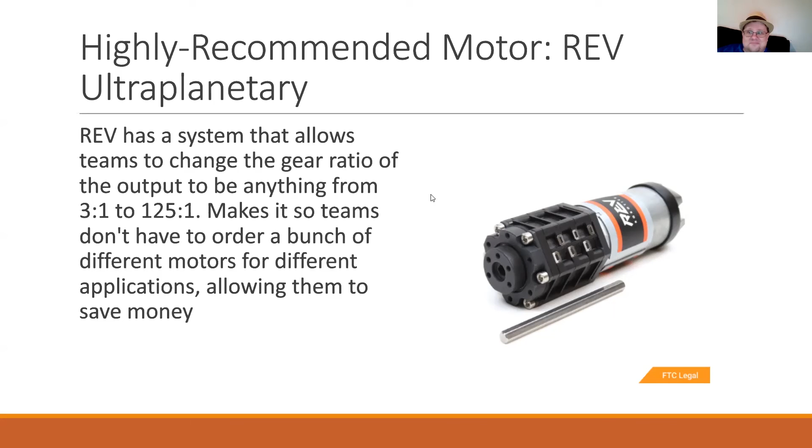Cool. Call me Rev, because I could use some sponsorship money. Okay.

Choosing the right gear ratio for your motor, particularly for your drivetrain. So gear ratio, if you're confused about what that means, it's essentially how many times the motor spins in a ratio to how many times the output shaft spins, whether that output be in gears or on chain or what not. This is just essentially saying, okay, how many times does the motor spin for every one time the thing I want at the end to spin? So for example, if I have a 20-to-1 gearbox, that means that my motor will spin 20 times for every one time that the output shaft will spin. So therefore, the higher the gear ratio, the slower the output shaft will spin.

And this is typically how we talk about it. Now there's up gearing and down gearing, and we don't have a ton of time to go over all that. But when we talk about a motor, this is what we typically mean.

Okay, so some basic math. If you want to know how fast your output shaft is spinning, if you have a 6,000 RPM motor and you put a 20-to-1 shaft on there, all you have to do to find out how fast your output shaft is doing is just divide by 20, to get the theoretical top speed there. So if you've got 6,000 RPM, you just divide it by 20.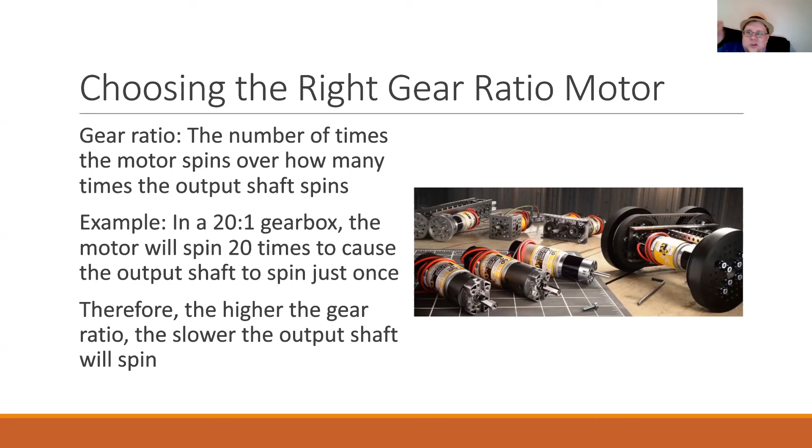There are some factors that do affect how much it will actually spin. There's friction, we don't live in a frictionless vacuum, but it works pretty well for this application. Again, this is a nice easy way, some easy math to put in your engineering notebook and say, here's our output shaft velocity here, and here's why we chose this velocity. Hint, hint, if you want to win the Think Award.

Okay, another thing when you think about what gear ratio to use is torque. Torque in a physics sense is just a force in a circle, it's a twisting force. Not a lot of you, some of you might have taken physics in high school yet, a lot of you probably haven't. I know a lot of my students haven't yet.

You'll learn all about how to calculate torque and all that, we're not going to get too much into that, but suffice it to say, the more torque you have on your wheels, the faster your robot will accelerate, meaning being able to go from 0 to top speed. Higher torque means it's going to be quicker to get to top speed, better it's going to be able to climb up obstacles or be able to push objects. So torque is all about that power, being able to push things.

And as it turns out, the torque of a motor increases by the same factor as the gear ratio. So when you're putting on a 20-to-1 gearbox, yes, you're lowering the speed by a factor of 20, but you are increasing the torque theoretically by the same amount. Now again, there's things like friction and all that, so it doesn't end up perfectly being that way, but close enough for what we're talking about here.

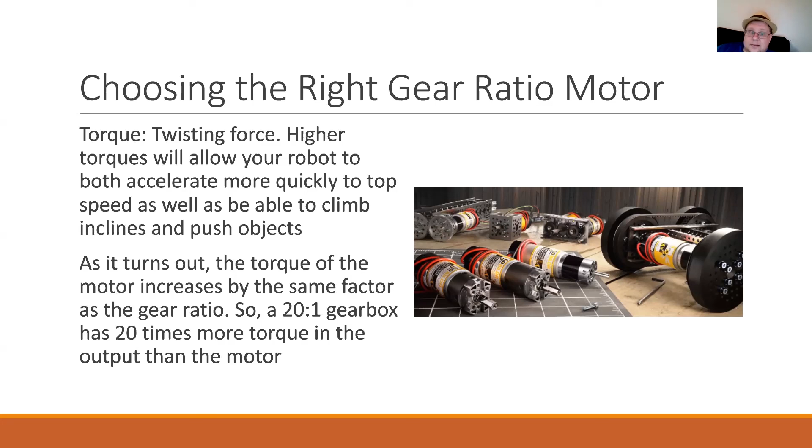Okay, so what are the better gear ratios for most robots? This is based off of the folks from Game Manual Zero, folks that have had experience in FTC. They give different recommendations based off of the diameters of your wheels, because one of the key things for torque is how big your diameter is, how big your wheel is. So depending on how big your wheels are, you're going to want to use different motors.

Here are two of the most common wheel diameters in FTC. You've got 4-inch wheels - they recommend using somewhere between 16:1 and 20:1. A lot of teams say that somewhere around 19.2:1 is the magic number. Again, I'm very hesitant to believe one-size-fits-all solutions because not all robots are the same, not all games are the same, not all situations are the same. So keep that in mind. But somewhere between 16:1 and 20:1, according to people that have done FTC for many years, this gives them the right balance between speed and torque to get done what needs to be done in that particular game.

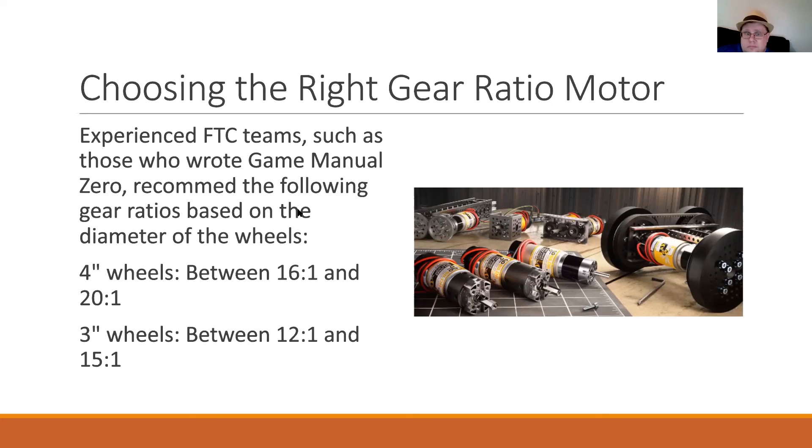We're starting to run a little low on time, so I'm going to move right along here. Last little bit is just some miscellaneous tips and tricks as you work on your chassis.

One, plan ahead. Plan where your REV hubs and cables go ahead of time. Again, the more you can CAD things out, the more you can think ahead, the less you're going to hate yourself when you actually get to competition time.

Because when you're like, oh yeah, I'll just slap this on here and it'll be fine, there's some headaches that can be had, particularly if you have cables that are just a mess and all over the place and unnecessarily complicated. Just plan ahead.

The last thing you want to have happen—there's a lot of ways you can have a dead robot. One of the most unfortunate ones to see is to have a wire pop out because they ran an arm next to it, it got caught, and it pulled the wire out, and then the robot just sits there. And you're like, well, that's terrible. I wish that didn't happen, but that's what happens when you don't plan out where your wires are going to go. A lot of teams forget about this.

Make sure you know or have a plan for where your wires are going to go, along with all of your other components.

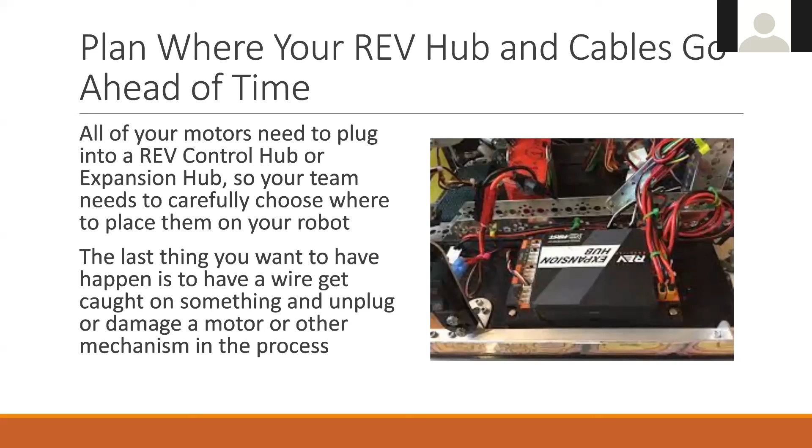Yep. Okay. Yep, some other things.

To answer what Nick said about not being sure how it affects judging - it affects it quite a bit. Any comments we get from any of the other volunteers are definitely taken into account.

So I guess the short answer: if you want to win a judging award, brownie points go a long way. Very, very true. And sometimes actual brownies. Although my stomach doesn't... okay, thank you.

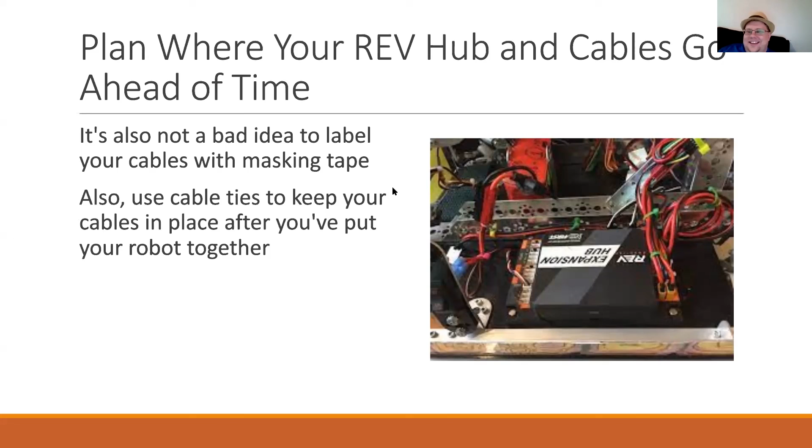If you're not sure if it's tight enough, try moving it by hand. If you can't move it by hand, it's probably tight enough - unless it's one of those Tetrix bolts, and in that case, no tight is tight enough.

And that loops back to doing stress testing. You've got a point fixed - this is an important cross member for our thing - you try and move it, okay it's not moving. Now go to an extreme, really try and torque it and move it. Not tightening your bolt, but the actual member that it's supposed to be secured. If it slips, maybe it needs to be a little bit tighter. If it doesn't slip, it's tight enough.

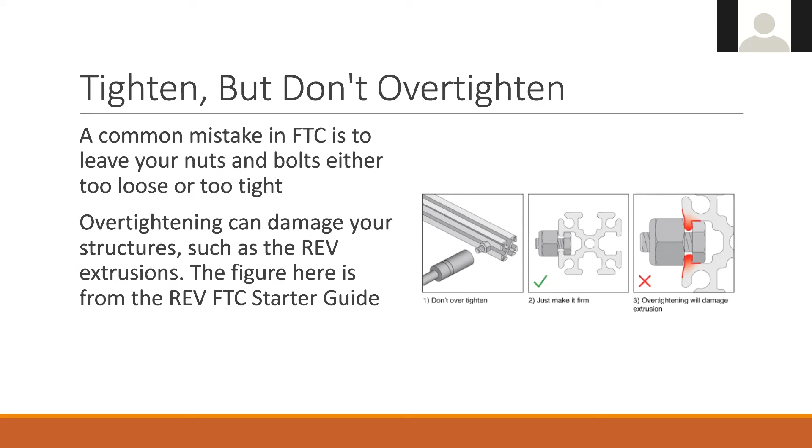Use lock nuts. Don't just use regular nuts - they will come off, you'll be finding them all over. You'll find paths of them wherever your robot's been. Use locking nuts, they're not that expensive. If you have a kit like Tetrix nuts, they're not good enough - use them for jewelry, things like that. If you have a Tetrix kit, go ahead and just buy some lock nuts.

One mistake I see a lot of people make with nylock nuts though - they are not reusable. What I mean is that the locking mechanism works because the nylock has a ring of nylon at the tip, that plastic piece. When you tighten your screw in, that nylon gets displaced and wedges into the bolt so that any vibrations won't let it slip back on the threads. That's what the nylock does. So after you've tightened a bolt and engaged that, the nylock will not do a proper securing ever again.

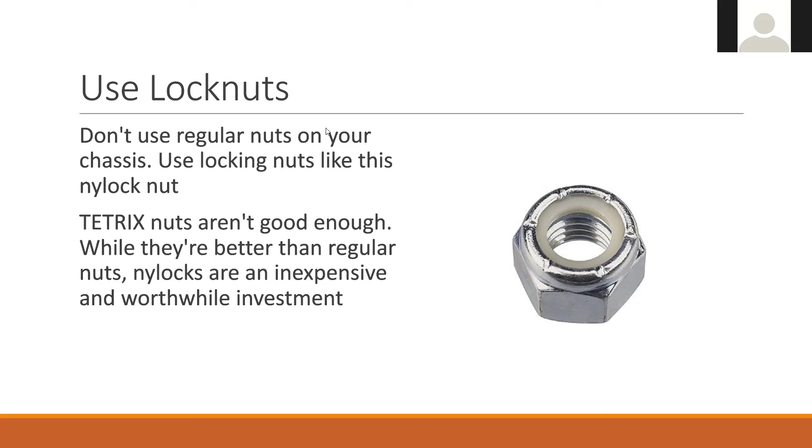As for the different kinds of Loctite, generally the blue one is your removable one. If you use the red one, that's permanent—forget about it. I've had to remove ones with red before; it is extremely tough. You're more likely to break the bolt, or your tool, or both.

Okay, other things to think about—I'll cruise through these a bit. Center of gravity is essentially the point of average mass for your entire robot. Think about an object's center of mass, like this remote—the center of mass is the point where I can put my finger on it and it balances, unless I knock it off with my own clumsy hand. It's the average point of your robot. Generally speaking, the lower your center of gravity, the more stable your robot is.

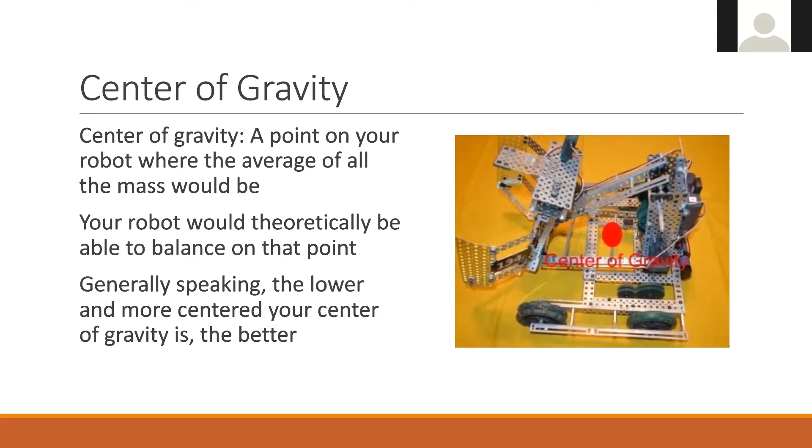You can try this yourself—if you stand up and start leaning forward, eventually you'll stumble because your center of mass shifts. If you're not understanding center of gravity versus center of mass, let me know in the Discord, and we can set up a stream using Kerbal Space Program to actually show the calculations and give a visual representation. If that's something you're interested in, hit me up in Discord and we'll set up a time to do that stream, since we're kind of out of time now.

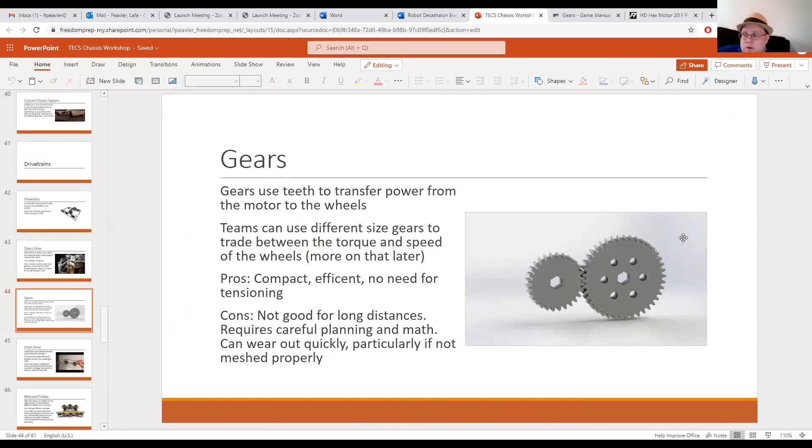All right, well, we ended a little later than I thought we would, but I think we got some great stuff here today. I hope you folks got some things you can take away into your alliances moving forward. Does anyone have any last questions about anything we've talked about today with chassis and all these different options?

Okay, well, for the rest of the time, this camp or workshop is designed to go till 3 o'clock, but now here's the it's-up-to-you part. Now that we've gone over these options, we'd like to invite you to talk it over with your teams and alliances and start getting some design ideas for what teams are going to take what challenge. You might have one team take the speed challenge and another take the climbing challenge, and start discussing how you can best use the time and resources each team has at its disposal.